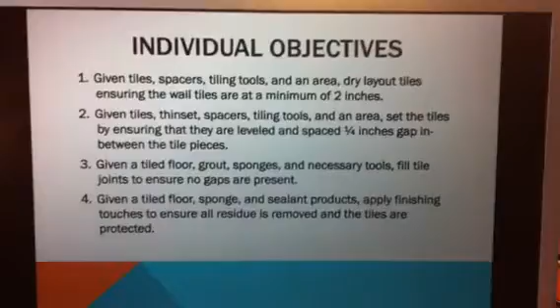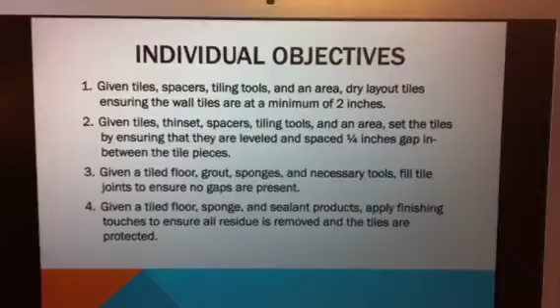Our individual objectives: we're going to go through this process, but this is just what we're looking at as far as each individual module, what we expect the individual student to receive upon moving on to the next process. You have to be able to master the first individual process to move on to the next one.

Instructional procedures. This class will be taught in a lecture format. Normally it's in a workshop format where the instructor interacts with the classroom student. But simply because we're recording this class from a remote location, it will be in a lecture format today. We're going to simulate the fact that it is a workshop so that the student can interact with the instructor.

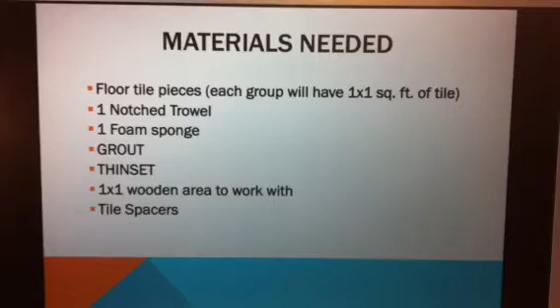The materials that we need, very important. We actually need the floor tile pieces. We need a one-notch trowel. The notch trowel is very important because there's a number of different trowels out there, but it's extremely important that you have a notch trowel, which is particular for tiling the floor. You need one foam sponge. Of course, we need grout and thinset.

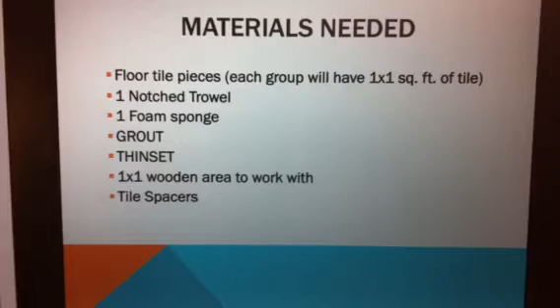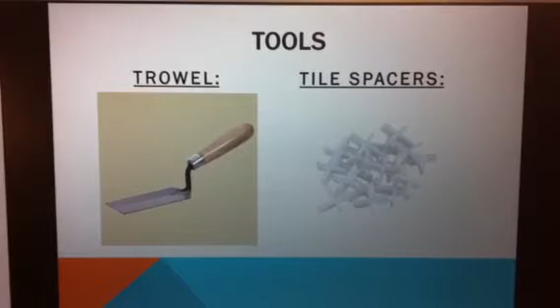For the simulation version of this class, what we normally bring is a 1x1 piece of wood just to simulate the actual floor itself. And then, of course, we need tile spacers. This is just a picture of exactly what type of trowel we're talking about, and of course the spacers are important too. From what I understand, the spacers come in different sizes, so you might want to look into that when you decide to begin this process.

Step 1. What we want to do is our dry layout process. We want to find the midpoint of the wooden surface, which is the middle of the floor, and we want to lay our tile out, just basically so we can get a visual of what it's going to look like.

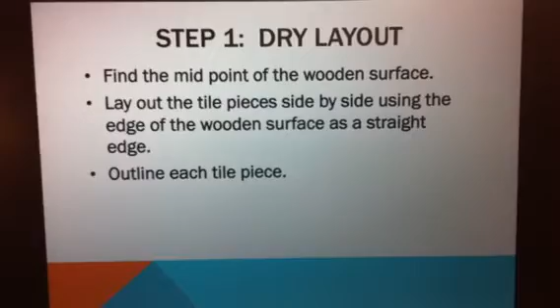You'll find sometimes that people actually start from different corners of the floor, because that's a simple process for them. But at the end, if you look in the opposite corners, you will find that the tile is almost always crooked. And if you can live with that, fine. But if you start from the center of the floor, most likely your floor is going to be evenly laid.

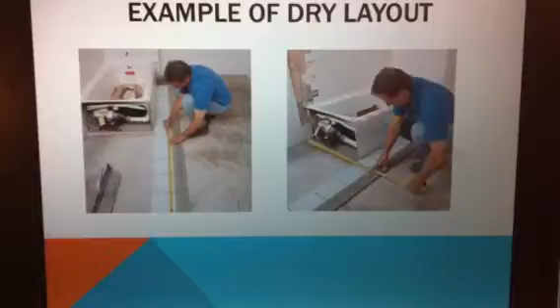Okay, this next step is really the tile placement. What we want to do is apply thinset to the wooden surface area, ensuring that the thinset is leveled and marked using the notch trowel. And then we want to position our tile as necessary. We want to insert spacers into the gaps to ensure that the tile is even.

So what I'm basically saying here is when you actually go through the process of laying the floor, you want to lay the thinset in a back and forth motion, and you want it to be smooth. Then you want to come back and lay your tile out so that your tile is evenly spaced. And you put your spacers in, and what the spacers do is keep the tile even when you're going through the layout process.